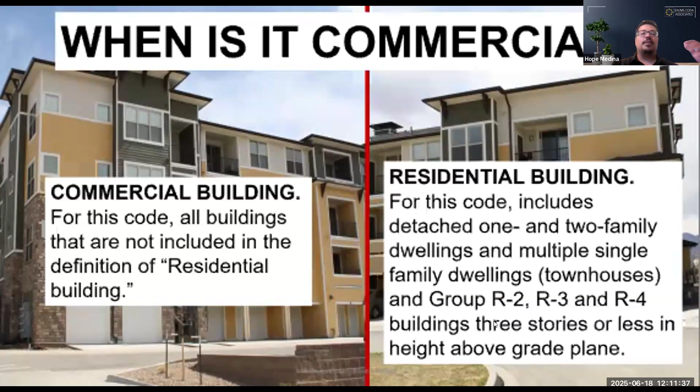There's a lot of parts of that would be built out of the IBC, but for the purposes of the energy code, we'd still be talking about a building where we could apply a lot of things where we're less than those 3 stories. We can still use some of our mechanical ventilation requirements, the same dampers that we would for any other 3-story building, right? There's a number of pieces and parts that fit the bill for that 3 stories or less above grade plane.

So great question again for follow-up. Thank you. Absolutely. So yeah, now we're going to move on to some definitions for you guys, right?

So I promised going over a few of these, and I'm trying to highlight what I feel are the most important ones for this discussion, because I think so much of this really has to do with how we parse out the scoping requirements. And so one of the first definitions we get in the 24 is common areas, and this is conditioned spaces within Group R occupancy buildings that are not dwelling units or sleeping units.

So remember how I was talking about earlier, a lot more of these apartment buildings, as we've typically seen, have the coffee bar area, the lobby and package area, maybe some common rooms for people to be able to use, maybe like all-purpose rooms, like an additional kitchen or things like that. That's not a dwelling unit. It's not associated with anybody's actual dwelling unit, but it's more of a shared amenity space and things like that.

And so we have these identified now as being these common areas within Group R, specifically in the code, right? And there's good reason for that. Not only is it consumer preference, and it's important that we recognize that, get it into the code so we can parse that out, but I think it's also following this train of logic where a lot of folks are pointing out that, okay, we've gotten a lot out of the thermal envelope, and there still is more to get, but it's incrementally more expensive to get, maybe a little bit less bang for your buck.

I was at a training the other day where Hope mentioned, basically she said something to the effect of, how would you show me the difference between an R100 and an R1000? Right? What's the difference going to be other than cost? And from a performance standpoint, it is going to diminish, was her point, right? Is there probably something you gain out of that? Sure. Is it enough to justify multiple changes to the code or things like that? That's where that sort of are you getting your money back over the lifetime of the building question comes up.

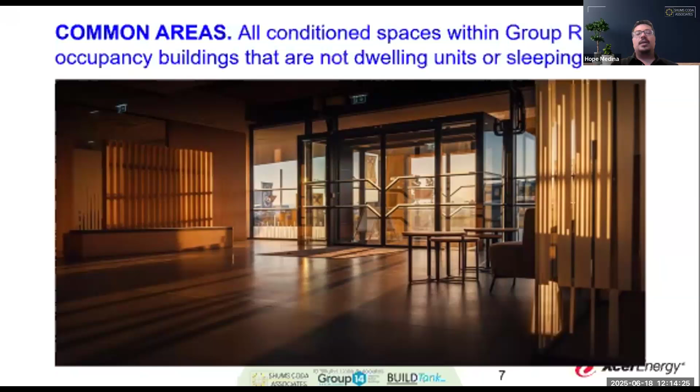These common areas, it would make a lot of sense for like the lights to turn off in them relatively more quickly, less power use than some of the areas associated with your dwelling unit, for instance. So it's a good example of places where we can start to highlight and find opportunities to be able to gain some additional energy efficiency.

So we have living space, right? So this is again defined. It's a new defined term. Space within dwelling unit for living, sleeping, eating, cooking, bathing, washing, sanitation purposes. Basically all the space that you typically use in your studio apartment and your regular home.

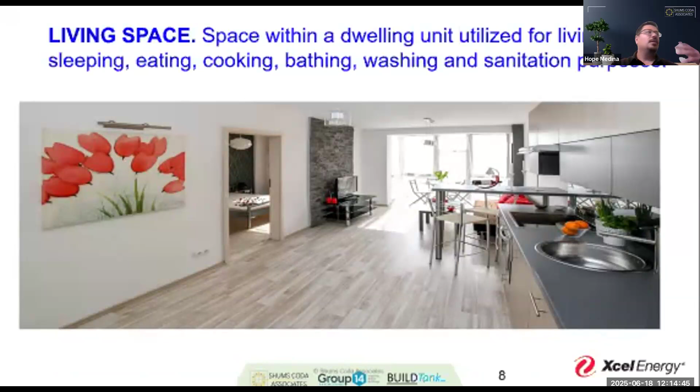And that's meant to juxtapose this area of occupiable spaces, right? These are areas where we are primarily there for like kind of single use or purpose, like a storage room, an equipment room, things to be occupied occasionally and for short periods of time is how the definition reads. And so again, we're parsing out these areas where we say, okay, this is very much sort of the purview of where somebody lives, eats, sleeps, all of that stuff all the time. These are the places that we can identify that are not used in the same way.

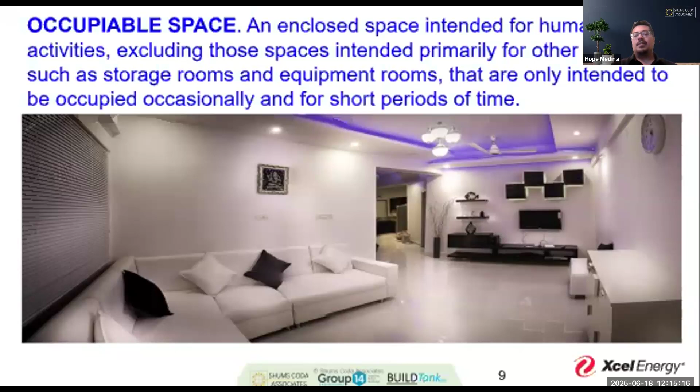I want to really bring this up because the definition out of the IBC is similar but different when we talk about occupiable spaces. So it reads a room or enclosed space designed for human occupancy in which people congregate for amusement, educational purposes, and occupants may be engaged in labor, things like that.

And we still have to provide the means of egress, the light, ventilation, sanitation requirements of the code for what you need there, right? But it is a different definition, and it is one where you do want to be clear about its use when you're talking about the energy code versus something out of the IBC, especially when we have this overlap in multifamily spaces. So just to bring a little bit of attention to that.

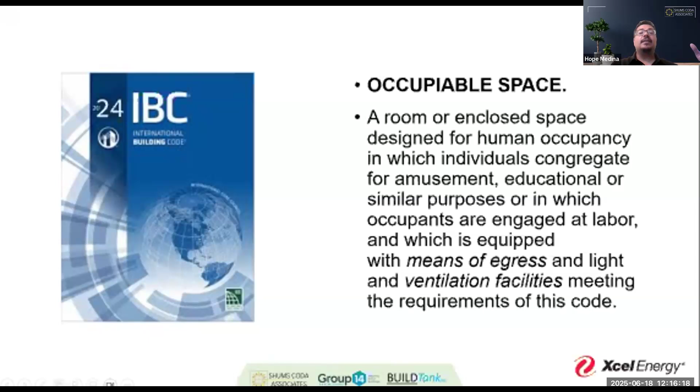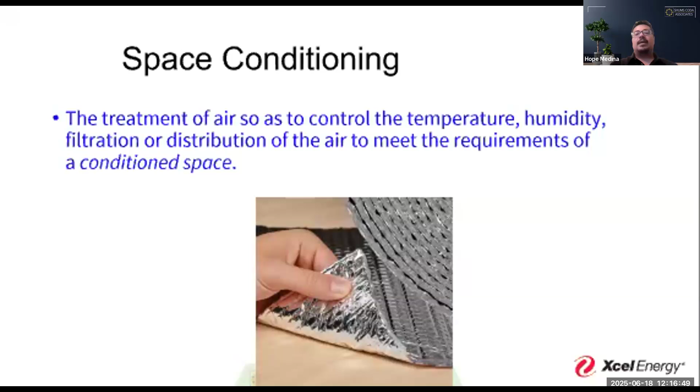So space conditioning is another defined term now, because we were just talking about conditioned spaces in common areas, right? Shared spaces that are not associated directly with any dwelling. Having a definition of space conditioning also helps clarify exactly what the intent is there. So this is the area where we are controlling the temperature, the humidity, the filtration, and distribution of air that makes it a conditioned space, right?

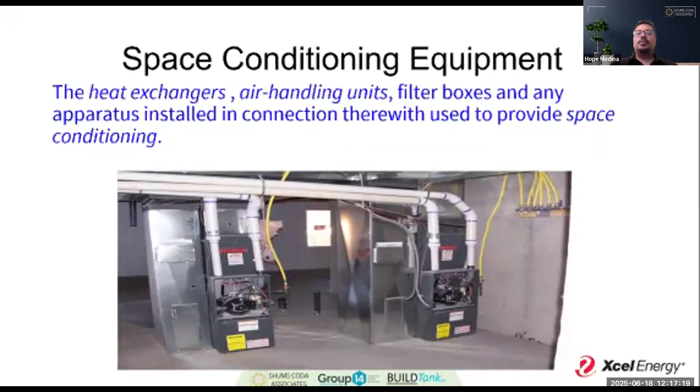We also have a definition of equipment. So we talk about heat exchangers, air handling units, and you notice both of those are italicized, meaning both of those also have a definition in this code as well. Filter boxes, any of the apparatus connecting that to space conditioning. So we can definitely see these through lines of identifying the different spaces, the different equipment, the different uses, and how that's going to translate to probably future iterations of the code and kind of what's targeted in the 24 for trying to find some incremental improvements.

So one of the things that I want to bring to your attention is when you have systems, mechanical systems, or service water heating systems that serve multiple dwelling units. If you do, this is your pointer to say, okay, if you're serving more than one unit, you are going to jump over to your commercial provisions. And you have C403, C404 identified expressly there, right? So this is again one of those places where we're going to say, okay, dwelling units that are self-contained will be out of the residential code. If that's not happening in the same way, then we'll jump over to a more commercial opportunity.

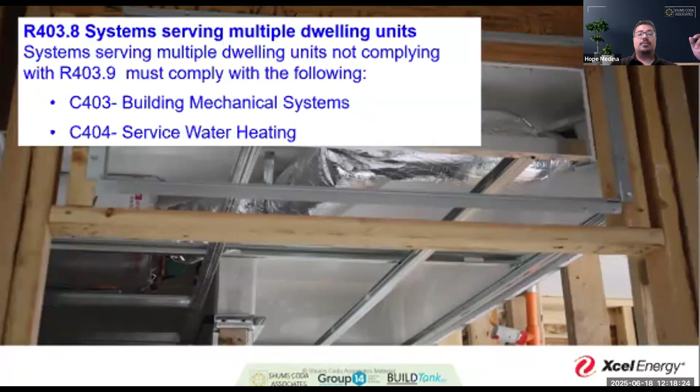So now we're going to move towards some lighting and power related stuff. Because like I said, this is kind of meat and potatoes for some of this comparison and a lot of that comparative change between the 21 and the 24 code. So these are going to be our big target areas: total power allowance, lighting controls, natural gas lighting, which isn't really a big part of this, but it is an important component that's seen a lot of changes in the 21 and the 24, and I just want to make you aware of that. And then electrical metering and reporting as well, monitoring, that whole gamut has been changed quite a bit.

So in the 21, we basically say, hey, your exterior lighting is going to meet the provisions of C405, with the exceptions of single-family homes, two-family dwellings, townhouses, and then solar-powered luminaires. We have a few options here where we can basically say, okay, we will let you off the hook with this. But in general, we're saying that even though you're a multifamily building, we're going to point you to the commercial lighting requirements, right?

And so when we read over this, we go to C405.5, right? That's our pointer. And we have a lot of exceptions that are tied into this, and we basically have a procedure that we have to follow. And so remember, let me go back a slide here, I'm looking at the residential code in the 21. So let's say I had a building that was 3 stories of R2. This is telling me, hey, for your exterior lighting, go to C405. Now, if it's 4 stories or 5 stories of R2, I'm doing that anyway. I'm still going to C405. So basically, this is the catch-all for multifamily construction as it relates to exterior lighting.

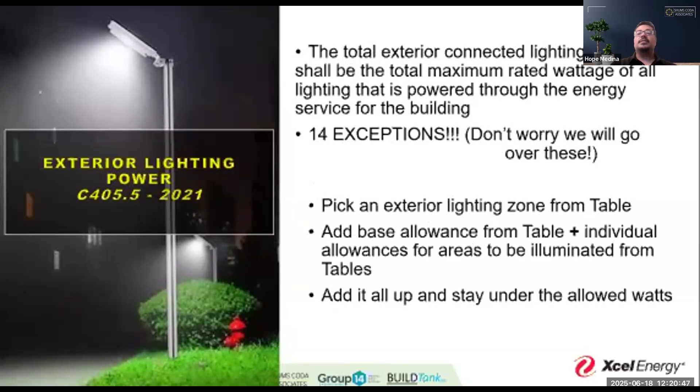And just so you're clear, this is the same procedure that your COMcheck exterior lighting certificate is doing for you. It's looking at these areas, it's looking at your square footages, it's looking at the declaration of what these areas are in comparison to that table, and then giving you that answer. So just in case you're curious.

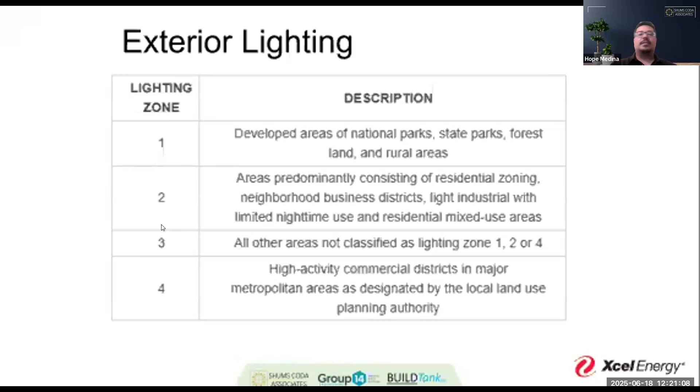So the first thing you do is look at, okay, what space are you in? You pick one of these zones, and then from there, we're going to start making some decisions. Now, the zones here, as they're written, I think it's relatively clear what it's describing. I find it interesting that lighting zone 3 is just sort of this catch-all that doesn't fit 1, 2, or 4. But let's see what that really means.

And then we also have a commercial sector located in that little downtown area there, where we have high rises, where we have extreme power density compared to some of these other areas. Now, one of the reasons I want to bring this up is because historically speaking, this is something typically within planning and zoning's purview for wherever you work, right? They typically look at photometrics, they look at that character of the environment issue and say, okay, this is our purview. We're going to say that that's too much light, you've got to bring it down.

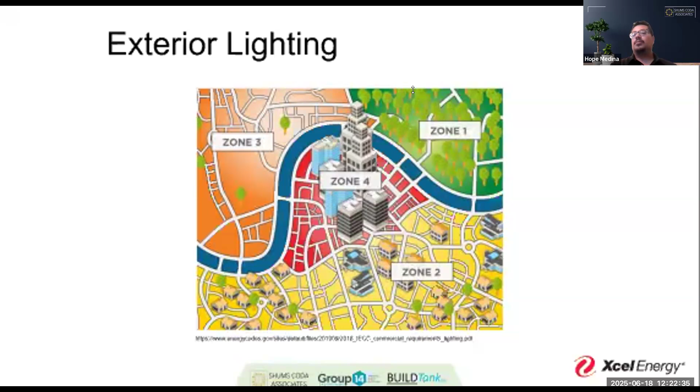And a lot of jurisdictions have been thinking about things like dark sky lighting. So it's really important that if you're looking at adopting a new code or addressing this in your code in the future, that you're aligning with any of those other provisions, because these have historically been places that building hasn't done the lion's share of the work on. And now we're really looking at this with significantly more intensity, so to speak.

So we jump over to our lighting allowances, right? And we see that this is broken up by those corresponding zones. So the first thing that, as a designer, you'd be proposing, or as a code official you'd be reviewing, is: do I agree with the zone that they picked? Okay, great. They said it's suburban. It's a small multifamily, say R-2 complex. Great. This seems to fit the bill. This makes sense for this zone.

Now we're going to look at that base power allowance, and we're going to start adding up all of these areas, right? So we're going to look at those square footage areas versus some of these other areas where they're measured in a linear foot, because that's typically how that lighting is going to be provided, say with walkways and ramps. You're not looking to illuminate that whole area. You're looking to illuminate specifically the area around that ramp or around that walking surface. But you see them, roughly speaking, trying to be germane to exactly what it is that they're trying to light up or provide in the space. So we add all that up.

We also have some additional allowances. Now, the additional allowances do work a little bit differently. We've got some specific areas where we might say, okay, additional lighting is warranted. We're not going to say that it contributes in the same way to the total power allowance here, for things like an ATM. We have building facades, uncovered entrances, inspection procedure areas, drive-up windows and doors. And we can see why that would make a lot of sense for the security of the folks working those areas, the ability to check on passersby or cars coming in and out. 24-hour retail entrances as well.

So we kind of get this idea that, okay, we're going to exempt some of these spaces that are specific to some of those uses that we might also find with multifamily, where we have somebody checking on a vehicle, things like that.

So let's look at the 24 code, and I'm just going to kind of highlight the changes for you because not a ton changed in here, but some clarification did. So we add language here that the watt allowance to the building and the site related to that building, to add a little bit of clarity, because, right, if you get, say, a guard shack for an R2 as you come up the driveway or something like that, oftentimes that little shack might be metered by itself, it might not be. It also is usually part of the overall site as it's developed, right?

And as it's reviewed. So again, this is one of those places that's a little tricky because we're talking about some of the places where sometimes zoning has that first sort of right of refusal of how we're going to parse this whole thing out versus how we usually conduct it, which is, okay, we're just evaluating each building on that site. Here we're looking a little bit more holistically.

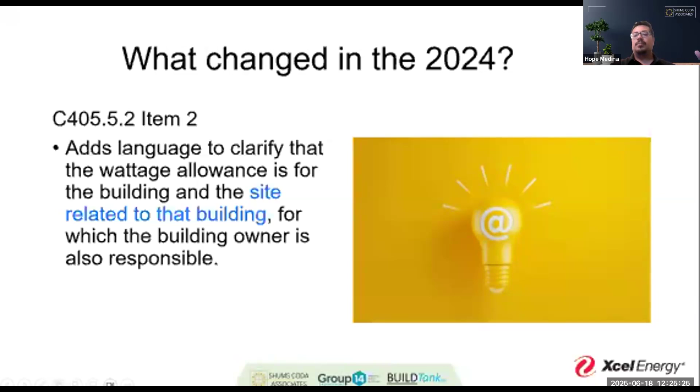We see some updates to the tables in the 24, so a lot of blue in these places. We see tighter densities overall, so the base power allowances have gone down. Some of these individual areas for what's allowed have gone down. One that I really want to highlight for you here is stairways, right? A lot of folks, when this first came out, had significant concerns about the issue of limiting light in areas meant for egress and what that could mean.

I mean, stairways, tripping hazards, right? They're like the number one reason that you get a lawsuit on a building. They're typically what we find to be dangerous areas in buildings. And the handrails, all the safety appurtenances that we put there are typically for the folks that are going to have the hardest time traversing those areas, right?

They're for everybody. But I've heard multiple good code officials, good trainers say that the code is made for old ladies and young kids. Right, we're going to try and protect those that can't easily navigate the world or protect themselves. And stairways definitely fall into one of those places where people easily get hurt. And so that exemption makes a lot of sense across the board there.

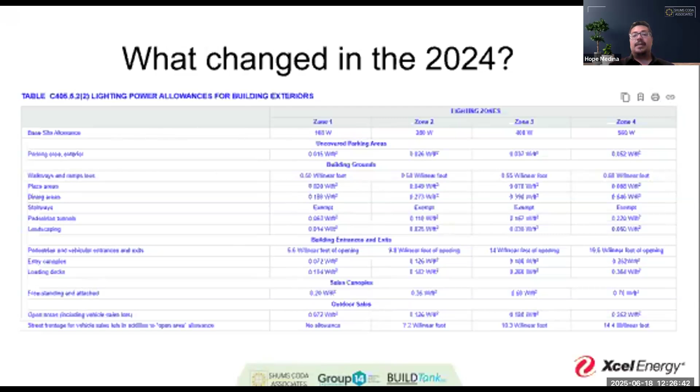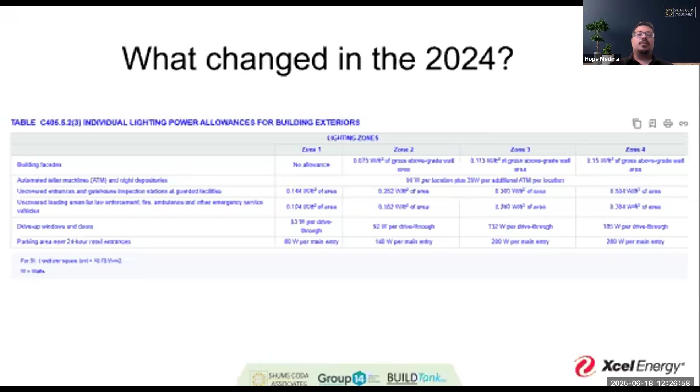But you can take a look for yourself at some of the other items here that have changed. That whole table is now published in blue. We also see our individual lighting zones, same thing. We've got a little bit more density, or excuse me, less power available for the density of the area is what I should say. But still, relatively speaking, similar to what it was in the 21 with updates, right?

And so, big sort of highlights of these changes. The base power allowances are much less than what was in the 21. In a lot of places, they're half, but it varies by the zone. The exemption for the staircases is definitely something to remember, and definitely, in my mind, a good change and advantage to the 24. Reduces the wattage per square foot, so making all of these areas more energy efficient. And then rewrites table 405.5.2.3 to make all items subject to light zoning requirements.

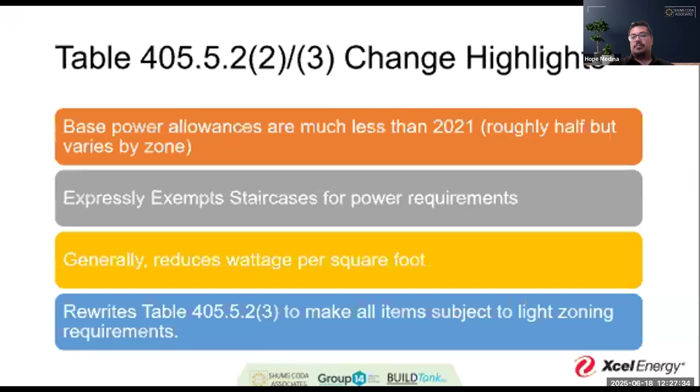Now remember that we had 14 exceptions, right, for the areas where we would say that the total connected power might not be calculated or included. And so we're going to go over those exceptions, and we're going to go over kind of what changed in the 24 for this. So one, right out of the gate, we say things approved by the code official for safety considerations. Remember, approved isn't a defined term, and that requires discretion by the code official to demonstrate approval.

This is a place where having a clear policy about how you define what a safety consideration is and how somebody might apply to use that exemption makes a lot of sense, because it is very vague in the code as it is written. And you could save a lot of time, a lot of effort, a lot of headache by making sure your staff is on the same page. So one person isn't just approving any lighting that somebody says, well, it's important for safety. Whereas maybe you have another one who's saying, no, not at all.

Like, you really have to demonstrate, keeping a very high threshold of what safety is and using their own discretion, finding some middle ground in there where somebody can make a case, or explain why this is important to their business model from a safety perspective, or things like that. And that includes multifamily areas, right? So if there are certain walkways or things like that that might abut a specific area that people have concerns about, maybe by train stations, bus stops, things like that, where you have a lot of traffic.

Those could be areas that would make possible sense. But once again, it needs to be specific, needs to be something that you outline a good rationale why, so you're not accused of prejudicial enforcement on any one particular issue or item.

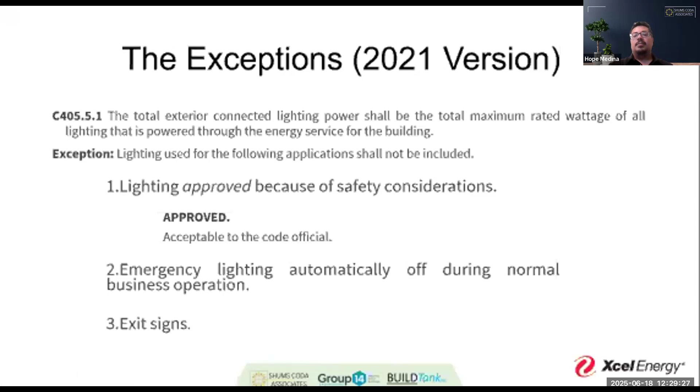Emergency lighting makes a lot of sense, right? We're not going to calculate that in along with exit signs. We're requiring that light to be installed. We definitely don't want that to say, well, now we have to limit or make dimmer the overall building because you've got to provide the exit signs necessary to be able to get out of the thing, right?

We also get specialized directional lighting and markings for transportation. This could be leaving a parking garage in a multifamily building, and maybe you have lights that let you know a pedestrian is coming up, or that spotlight pedestrians coming up. That could make a lot of sense in a circumstance like that. We don't want to create issues where things are unsafe for folks.

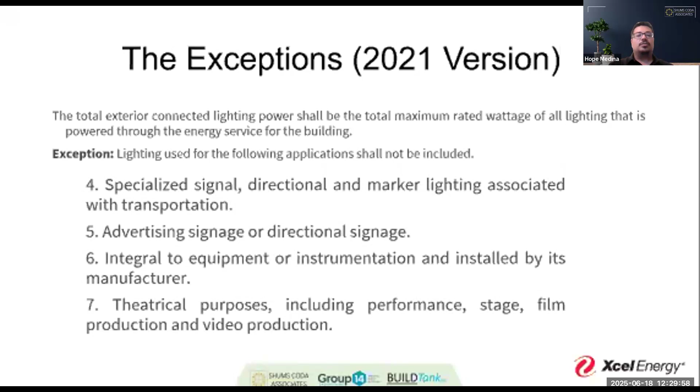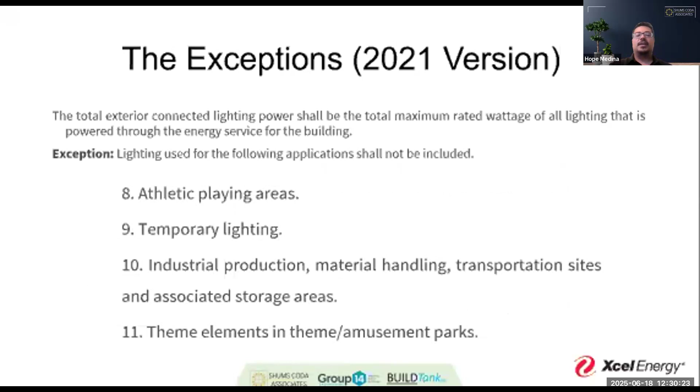Advertising signage, directional signage, theatrical purposes, some of these are less germane to that multifamily question. Athletic playing areas, that's definitely one that can come up there as well, right? Tennis courts, pickleball courts, things like that that you might have associated with an R2. Temporary lighting, event lighting, things like that. These are all places where we might look at specifically with that R2 lens and say, okay, we're going to figure out how we're going to address this issue of additional power.

Public art, monuments, and the national flag. Once again, I will highlight for you that that is specific to the national flag. I know a lot of developers that have maybe multiple monuments around a traffic circle that have state flags, their own flag, their icon, whatever it is. And so, again, having a clear definition of how you want to handle that policy, making sure that it's either specific to the national flag, or if you're adopting it, making any alterations that you want to be more pluralistic.

Definitely this is a place where I think it's worth highlighting, just so somebody doesn't make the wrong choice, whatever they end up doing, or misinterpreting that to be more broad than it is. Water features, swimming pools, definitely germane to that R2 question as well.

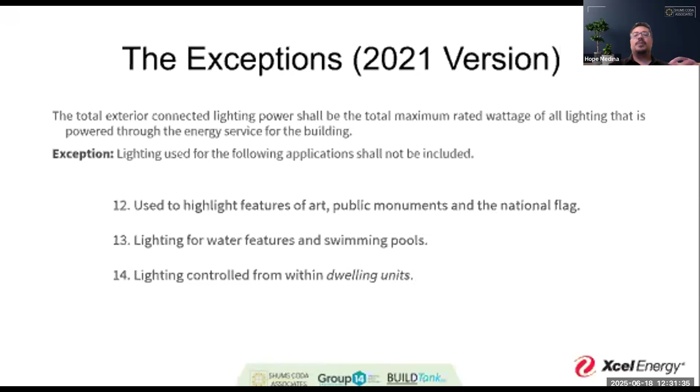And then obviously lighting controlled from within dwelling units. So that's going to be an important one that we'll get to more towards the end of the presentation for the lighting components, because you still have your exterior lights on people's porches and things like that, and those are going to correspond to those dwelling unit related controls out of the IECC. So it's going to be a little more specific than that.

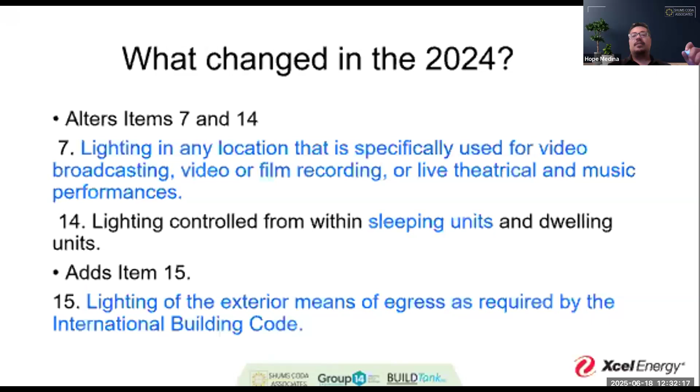So what changed in the 24 in all of these exceptions? Well, in 7, we get lighting in any location used for video broadcasting, not anything particularly specific to an R2 configuration. But if there are, for instance, some areas with apartments and maybe a wedding venue or something like that, where there is any equipment, maybe this is a place that might come up. There's a few different ways to look at that. Sleeping units, and then lighting that's required by the IBC in and of itself. So we get a little bit more clarification about those things.

So here we see an exterior lighting plan, right? So we're looking at this from a commercial perspective. We've got a large parking lot serving a large commercial building. And here might be an example of what we're getting for our lighting compliance certificate, where we have our parking areas, we have our units for wattage installed, and we get a clarification of how well this passes beyond code.

Now, if you had your druthers, this might be a place, depending on which code you're on and how much of a role your zoning department plays, if they can help review this document by requiring it and receiving it, or if you're taking any other pathway like a simulated building performance pathway. You can also produce a lighting certificate that's very similar to this.

But demonstrating that and showing that this is in compliance might be a way to make sure that your requirements align, that you're not approving this saying, well, you passed your exterior lighting COMcheck, but your zoning department is saying, yeah, but you still have the wrong amount of lighting for our needs or our requirements or our zoning resolution, making it very clear that you aren't doing the same review or supporting each other with that. Those are the kind of concerns that as you look at adopting this code that I would have from an administrative standpoint.

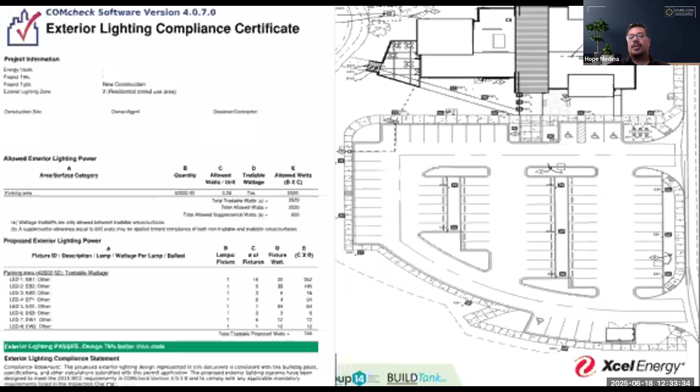So then when we jump over to the 2024, things look a little bit different when we ask that same question of going to R404.1 and asking, how do I handle exterior lighting? Well, this has a different pointer. Remember, the first one we looked at said, hey, if you're residential and you're multifamily, just go to C405. Just go over to the commercial code and start using that.

This reads a little bit differently, and it says R2, R3, R4 buildings are going to comply with these sections 404.1.2 through 1.5. And then we get our same exceptions for the most part here, that are, hey, we're going to exempt our single family dwellings, our townhouses, solar powered related lamps, motion sensor lamps, other luminaries that comply in this particular section.

So now we're saying, hey, if you're multifamily, we're not going to send you to the commercial code. We're going to have you use these provisions so long as you still fit the residential definition of the IECC. So really important change there for that pointer in the way that it works. So now in the 24, if you're above 3 stories or you don't fit that typical parameter of that residential building, great, go work with the commercial section of the code. If you are, stay here and continue to read.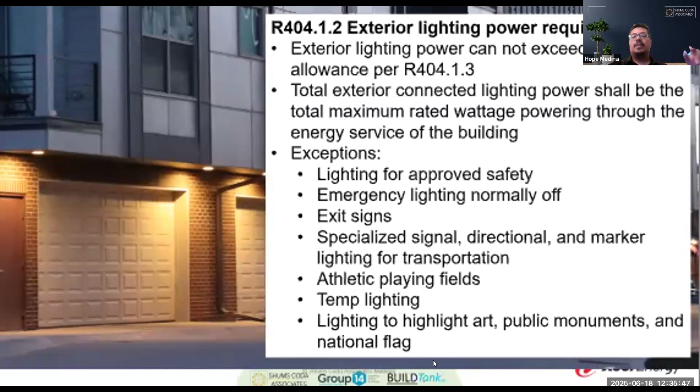Remember, again, this isn't italicized here, but it should be, in my opinion, because it is a defined term and it does require discretion of the building official to demonstrate that it is approved, but neither here nor there. We also have athletic playing fields, right? We talked about that earlier. Specialized signals, exit lights, temp lighting, public art, monument, national flag. Again, that national flag thing did not change between the 21 and the 24. So you can see that they've sort of parsed this out specifically to what's important for multifamily.

And so we get a similar chart to what we looked at earlier, but remember, this is still in that table R404. So we're looking at this saying, okay, go to the power allowances right down here. This is a little clunky the way that it's written too, I will tell you. The first thing we get is, hey, stay here, read these sections. And then before we get to the rest of those sections, we get the lighting power allowances table. It's a little clunky, it's a little off on the way that it's written, in my opinion.

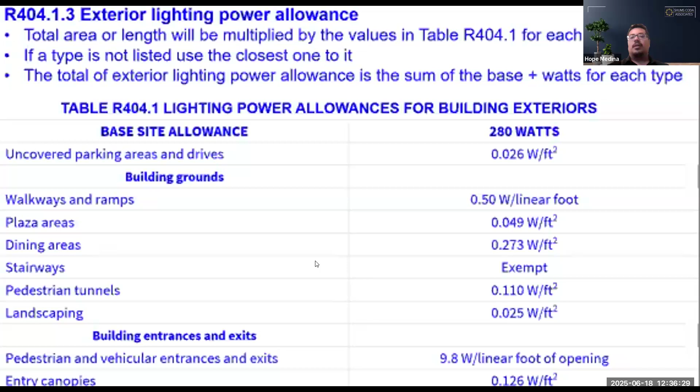And we get this base power allowance right out of the gate, right? And then we also get these other areas that can be associated for our power allowances, for building exteriors. So that's in high level, sort of those differences in the way that the overall setup is between these two codes and the way that it's going to work between them.

Then we kind of get back to dovetailing on some things with exterior lighting controls. A lot of this has remained very similar, right? We have automatic daylight shutoff. We don't want to run the system if daylight can handle it. Decorative lighting shutoff has this 1 hour capability, right? So it gets sort of a set point associated with it. And then lighting setback can be reduced by 30% from midnight to 6 a.m. or 1 hour after closing, or no activity after 15 minutes.

Now, a lot of that you would typically see associated with some of those business occupancies, but remember, with podium type construction, you can have that sort of same issue where you're going to have your business occupancies and your residential tied directly to it.

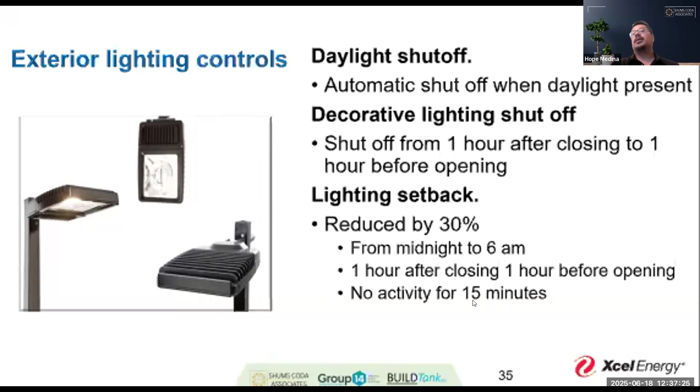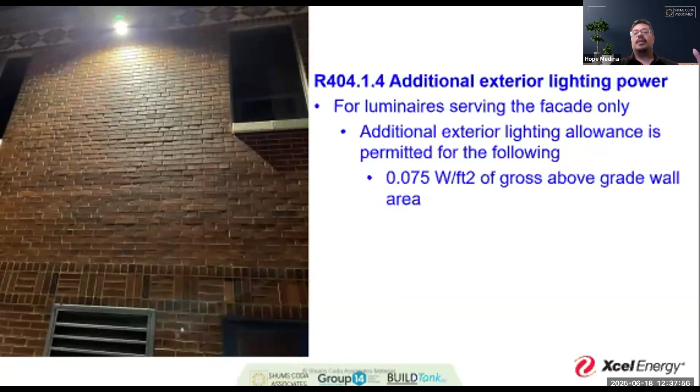In 404.1.4, in the residential section in the 24, we get an equivalent amount of wattage per square foot, that 0.075, for building facades as well to be illuminated. So this sort of dovetails with what was already in the commercial sections that we just looked at a moment ago, but we just add this in for specificity because once again, we are talking about these instances where we are, instead of sending people to the commercial code, keeping them here and giving them all the parts that they need to navigate the multifamily question.

So again, here we're seeing some exterior lighting components and controls and kind of questioning, okay, do we have the information that we need? Okay, we see a timer located right up here. Timer would work. Timer is a valuable option to be able to use for this. That can go, right? So our time switch function, if we're going to use something like this, we get a 7-day clock. We've got some basics associated with this for its automatic shut-off features, has to recognize holidays, has to have manual override, and then control light has to be 2 hours or less, and illuminating areas less than 5,000 square feet.

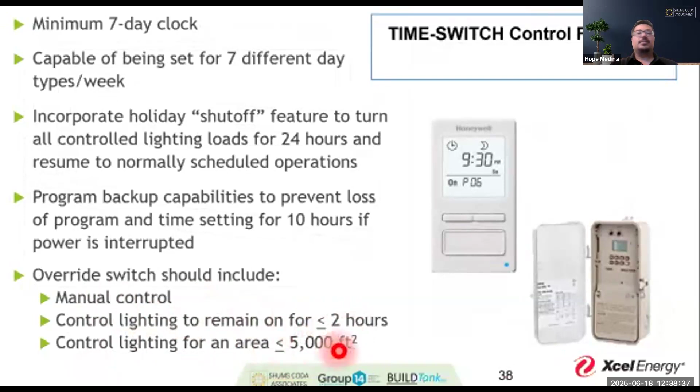So on our plans, we should typically have some sort of lighting control narrative that's going to tell us, okay, where are these mounted? For instance, here we have an exterior mounted relay switch, and it's running off of that astronomical clock for sunset and sunrise. Right, so it's recognizing those things there.

We also have vestibules, another place where we might have that common area question, right? As you come into your R2, you might have a lobby with a vestibule. That vestibule needs to be recognized accordingly for its lighting as well, and provided in this particular chart, they're kind of breaking down each and every step along this and giving us that relevant sequence so we can know as the plans examiner, great, I have what I need. This whole thing for this project works in terms of its required controls, and it makes it really easy for the folks out in the field that have to go and figure that out to make sure that what was installed is accurate.

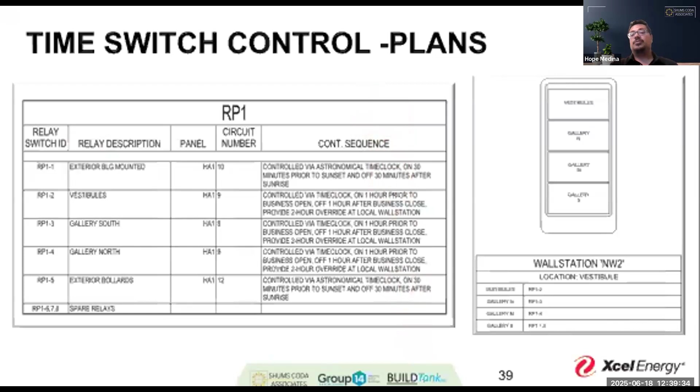So when we talk about common areas, we do have a couple of other items to bring up. If we're talking about the commercial code here, I'm going to take you to C409.6.1.6. And basically here it's the exceptions that I want to point out for you for our maximum miscellaneous loads. So when we're talking about dwelling units, you get 0.42 watts per square foot for any additional maximum miscellaneous equipment load. But multifamily common areas have none. So just to be perfectly clear, when you look at that miscellaneous equipment item, and you're looking at those R2s that don't fit that parameter of being in the residential section, make sure that no one's claiming additional miscellaneous load for those common areas.

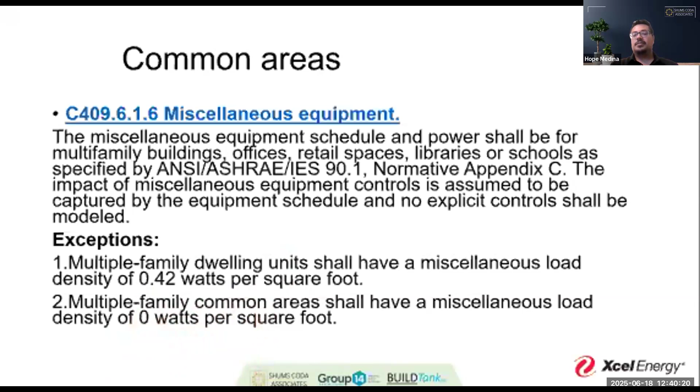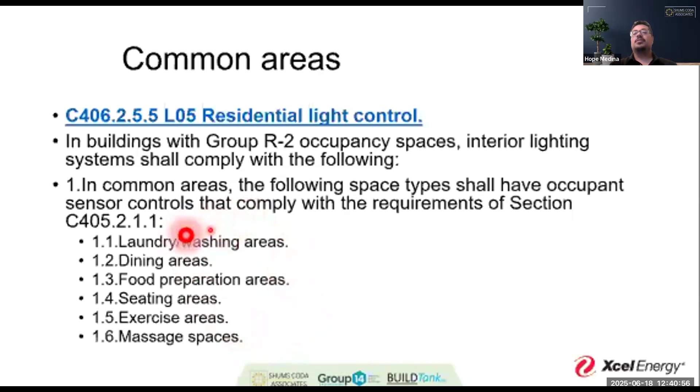And then again, for common areas here, right, where we talk about R2 occupancy spaces and interior lighting systems, these are areas that are outside of the dwelling unit itself, but again, serve those common area uses. Those can be our laundry rooms, right, dining areas, seating areas. Maybe you have a little movie theater area or something like that. A small gym is super common to provide in a condo space or things like that. These are some of the areas listed here where we're going to say, okay, the occupancy sensor requirements are also going to be part of your conversation.

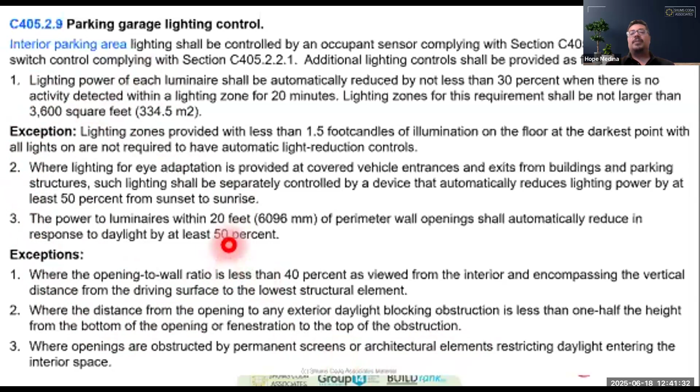So now let's step completely out of the building and let's talk about the parking garage lighting controls. So we have some small updates to this in terms of location, moving that over to C405.2.9, and we explain that, okay, our interior parking areas are going to follow our requirements, but between the 21 and the 24, there are very limited changes in this. So we are going to be controlling that overall amount of light, decreasing the amount of luminaires that are going to be running fully, and dropping that by that 50% threshold here.

So this is kind of your summary slide of all of that code, so you don't have to read it all at once. But you can be on an occupancy sensor or a time switch. You're going to reduce to that 30%, no less than 20 minutes. Zones can't be bigger than 3,600 square feet. Entrance and exit separation lighting.

Let's see here. Sorry, I need to move one of my windows because I can't read my slide with my own face looking at me there. There we go.

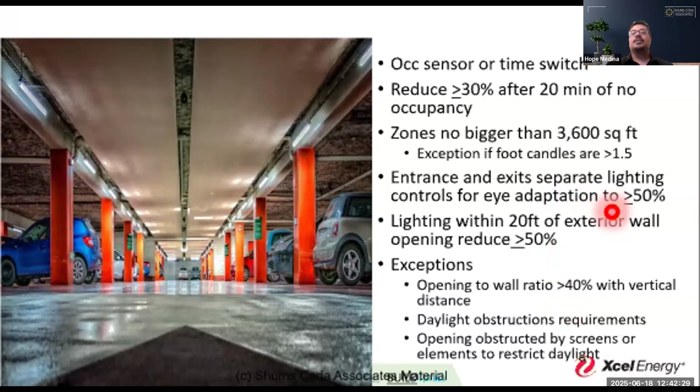For eye adaptation to 50%. So that's basically saying, hey, okay, it's really dark in here. As you step out onto the street, if you want to add additional lighting to make sure that it's a safe transition, that can be done. That does make sense, right? So you're not just getting blasted by a spotlight, because Lord knows I've had that happen to me a couple of times. And if you have like an astigmatism like I do, then yeah, good luck seeing for like a good 10 seconds trying to make a blind turn, right? So we're just trying to keep that a little bit more safe.

And now we're on to fuel gas lighting equipment. So in the 21 and the 24, basically both of them have the same provision that you can't have a continuously burning pilot light. One thing that I do want to bring up on this is who inspects that issue. Is it your mechanical inspector who's looking at the gas piping? Do you have somebody in your shop that is specific to energy and sustainability who will be reviewing final equipment? Is that done at final building by your general building inspector?

Who is going to be responsible for identifying and facilitating this inspection on gas lighting equipment to make sure that it's functional and that it's not equipped with the continuously burning pilot light? Now, the good thing is that because we've had 2 iterations of code cycles in which continuously burning pilot lights for gas lighting have been prohibited, a lot of manufacturers have come up with solutions for that.

And now in the 24, we get defined terms for every one of these, which are on-demand pilot light, intermittent ignition, and interrupted ignition, which also tells me that the manufacturing industry is specifying exactly which of their products will fit which of these definitions. And because there's more than one way to go about doing this, folks are exploring this space and coming up with logical, sensible solutions to be able to provide this lighting.

Now, the other thing that I want to bring up is depending on if you've looked at the MLECC, that's the Model Low Energy and Carbon Code from the Colorado Energy Code Board. Gas lighting has been one of those things that a lot of folks have said, hey, it's not used very often, so maybe just prohibiting it outright makes sense. I know a number of places have made recommendations to that effect.

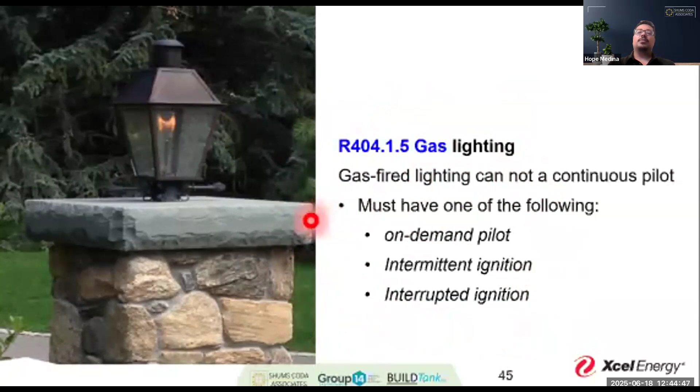So energy metering. These are all new in the 21, I want to be very clear. This blue language came out of the 21 code, where we're looking at energy monitoring and energy metering. Now, Colorado's also got its own thing going. A lot of folks are familiar with the energy monitoring and building performance requirements from previous actions from the Colorado Energy Code Board, and I don't want to confuse those at all. I just want to bring up a couple of things specific to energy metering and monitoring as they relate to the 24 code and your next steps.

Specifically when it comes to energy metering, you can submeter specifically for exterior energy use and some of these other items for that kind of tracking. That is enumerated in the tables below this. The other things added in the 24 included some data collection related updates, some service water heating related updates, and some renewable energy specific submetering and non-electric submetering. If you haven't looked at this in a while, or it's been on autopilot because you have the state program, it's worth familiarizing yourself with the differences between these two.

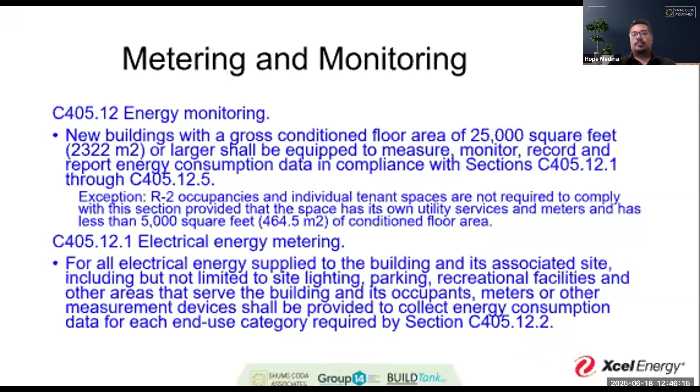So new to the 2024 code, 405.15, we have on-site renewable energy. This is a requirement to add renewables to buildings with some express exceptions where you have low solar radiation. I didn't include the whole definition here because it was really long, but it basically says you can't get enough solar radiation to justify the installation of the assembly.

Another one here is 80% of the roof space has permanent obstructions. So again, we can't put enough of a system on there to justify the full installation. If the building is shaded naturally for 50% for more than 2,500 annual hours, as it's analyzed there, if you're looking at that and saying, "Hey, I sit in the shade of a mountain."

There is no way, like I can put as many solar panels on this building as you want, and it still won't capture any sun because sun doesn't hit here except for a couple hours and a few months of the year." Well, they're going to take that under consideration to say, okay, these are exceptions to the on-site renewable question. And then your gross conditioned floor area less than 5,000 square feet.

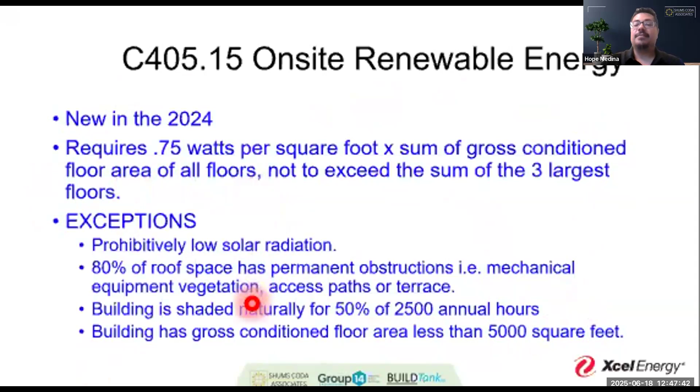Now, if you fit these exceptions, or you can add some but you can't get the full amount that you are supposed to out of C405.15, then the code points you to another direction, which is offsite renewable energy. And it says, okay, if you can't do that, then you're going to buy some additional on-site renewable or offsite renewable energy. And it has specifics on how long the contract is supposed to last, that it's 10 years, and must survive a partial or full transfer of ownership of property.

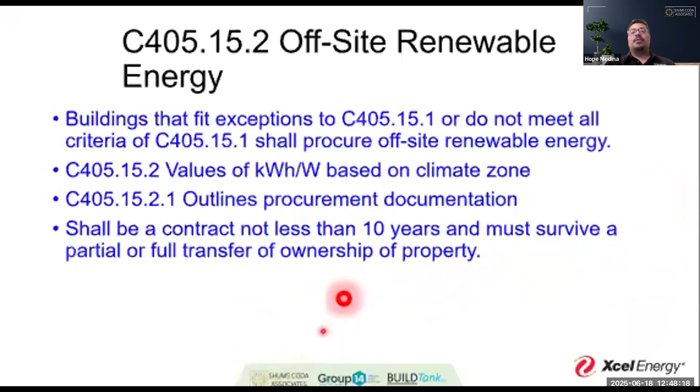So there are some parameters here to really look at and familiarize yourself with, especially as you look at, once again, the MLECC, that's the Colorado Energy Code Board's recommendations, and just making sure that you understand the way on-site renewables and off-site renewables are going to fit in this overall conversation about the energy code as a whole. So don't forget, we also have pools, spas, and all of this fun stuff. So we're going to hit these fairly quickly.

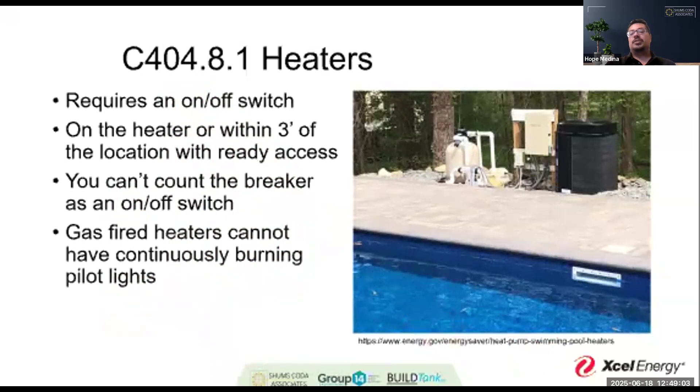So pool heaters, we're going to go to C404.8.1. It requires an on or off switch. The on or off switch cannot be the breaker. It has to be a specific switch within 3 foot of the location with ready access. And gas-fired heaters, once again, can't have those continuously burning pilot lights. So we're back to the same issue of using those definitions out of the 24 for intermittent, on demand. There's a few different ways to look at those pilot light issues. Now that they have definitions, that's kind of clarifying about exactly how to handle that.

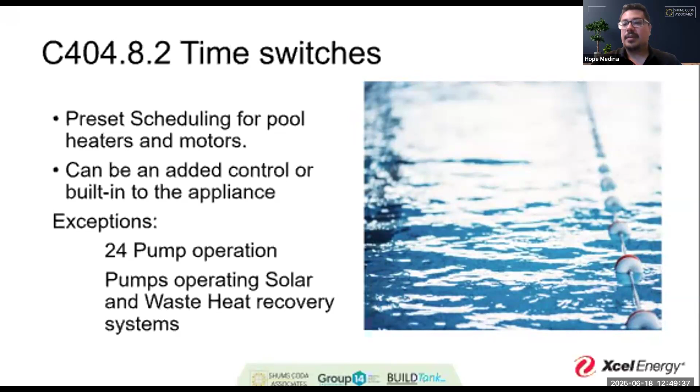Time switches for pool heaters and motors can be added as well. However, there are exceptions if you have a requirement from a public health perspective that a pool needs to be in 24-hour pump operation, or you get a percentage, 75% of the energy needed in order to run that pool heater from solar energy or waste heat recovery systems, renewables, that sort of thing. The important thing to remember there is it is specific to the use of that pool, not just the overall building. So that gets a little bit more clarified in the 24 as well.

In pool covers here in the 21 and the 24, we can see that we get that clarification. So we have the covers definition on both sides here. Not a lot of that has changed. In the 21, we see, okay, we have this 75% of the energy used for heating, not less than 3 calendar months, is from a heat pump or on-site renewable energy system. You're not required to install that cover.

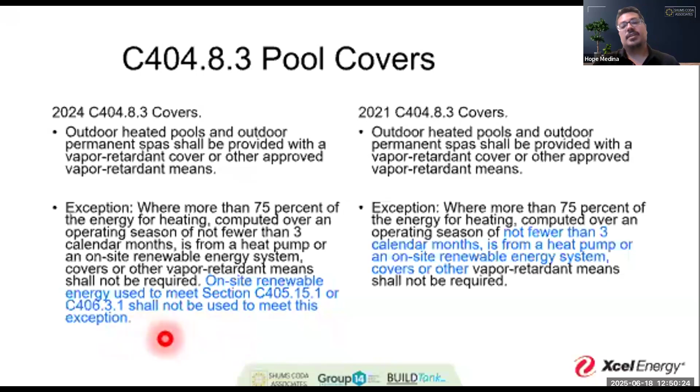And so we keep that same sort of language, but we also add that on-site renewable energy used to meet C405.15, which is what we were just looking at a second ago to say your building needs renewables in the first place, can't be used to meet this exception. So once again, this is specific renewables to cover the pool. Your pool and spa standards, if you have to look at those, you're going to be looking at APSP 14 and 15. Specifically, 14 is for portable spas. 15 is for permanent.

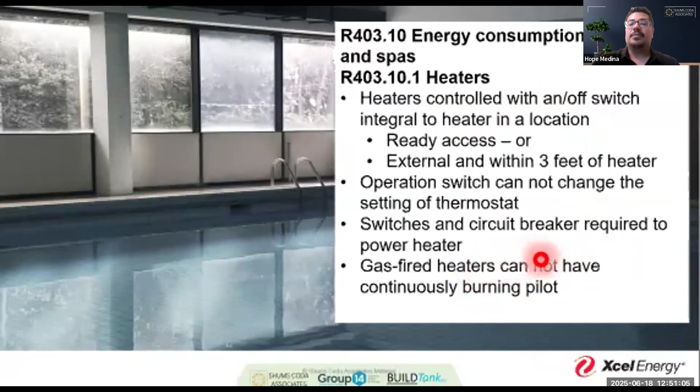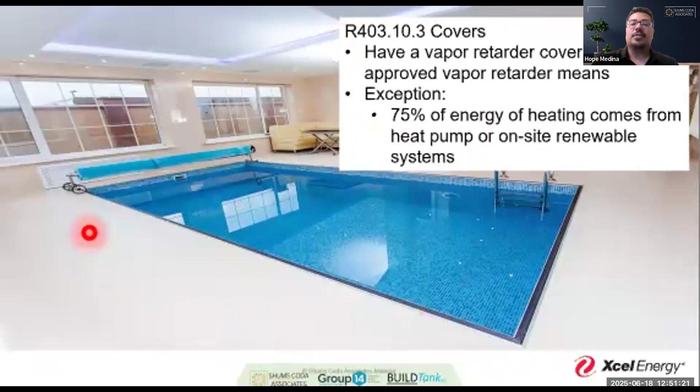So again, if you're looking at this from that residential perspective and you're in that multifamily R scenario, then same thing. We're looking at similar control related items, similar issues with the pilot light needing to be non-continuous for its burn, and you can't use the circuit breaker for the switch necessary to turn off the heater. You can use time switches and you get the exact same sort of exemptions here. So a lot of duplication in these places for alignment between these two codes. And again, same thing on your covers or vapor retarders going over that pool. So in large part, a lot of similar requirements. And your energy consumption will comply with APSP 15 as we discussed.

So now let's move over to heating the outside or adding those cool appliances on the outside people love to use. If you do, first of all, you have to use a radiant system in order to be able to heat that space. Radiant systems can be a number of different types of system. They have to be able to turn off by themselves, using an occupancy sensor or a timer switch for shutdown. But they can be electric resistance heating. They can be fuel gas systems. They can be fuel-fired systems. There's a number of different ones out there for heating exterior spaces, like this fireplace right here, but these are the parameters for them. They do have to be able to shut off by themselves. They can't be left running.

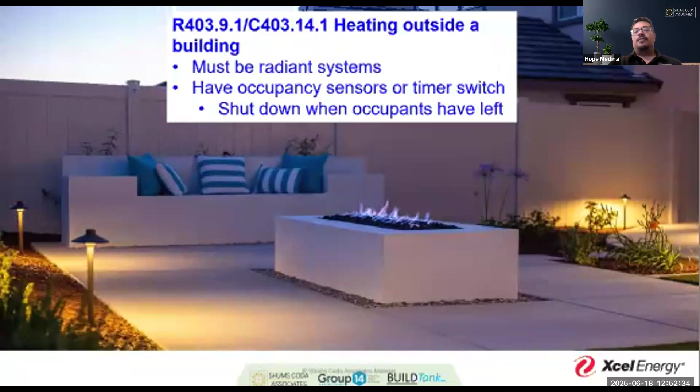For snow and ice melt systems, notice here what I've done is just on both of these, I'll go back a slide for you. I've put the slash in here because they're literally identical between these two codes. So once again, there's a lot of alignment here. And so R403.9.1 and C403.14.1, depending on if you're in residential or commercial respectively, are very much the same, along with R403.9.2 or C403.14.2 when we talk about snow melt systems.

They have the same requirements for its automatic shutoff when we're talking about that 50 degrees or greater and no precipitation is falling there. And they can be turned off automatically. They can also be run manually, right? So there's a number of different sort of items there with your controls.

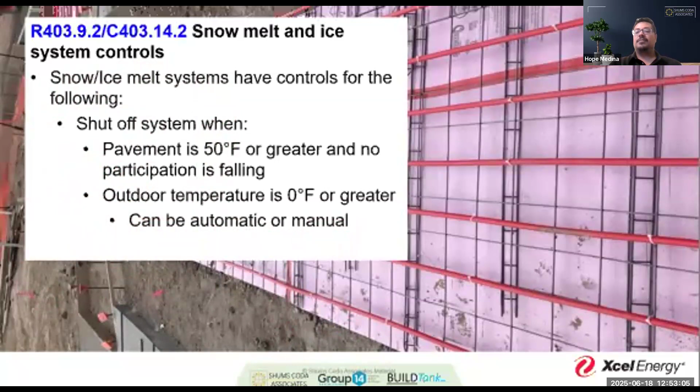On roof gutter and de-icing systems, again, we get the same sort of items between the two codes, and we get some specific items for our controls. So again, that 40 degrees, or we can use a moisture sensor, daylight sensor, right, for either of these options for controls. And we get that shutoff trigger point there.

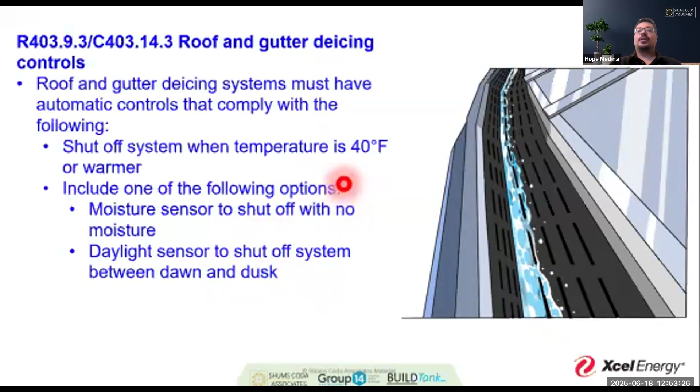Last but not least, we also have deep similarity there between R403.9.4 and C403.14.4 on freeze protection for systems as well. So if we have that outdoor piping, heat exchangers, those sorts of things, then we get our set points for shutoff, as well as identifying when conditions that liquid will not freeze. So we get some specificity there that aligns between both codes.

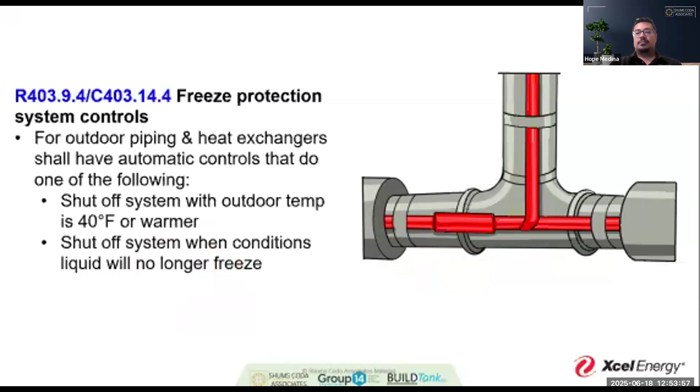And that is basically the large part of our presentation for today. So to wrap things up for you, remember, we just finished number 2 of these.

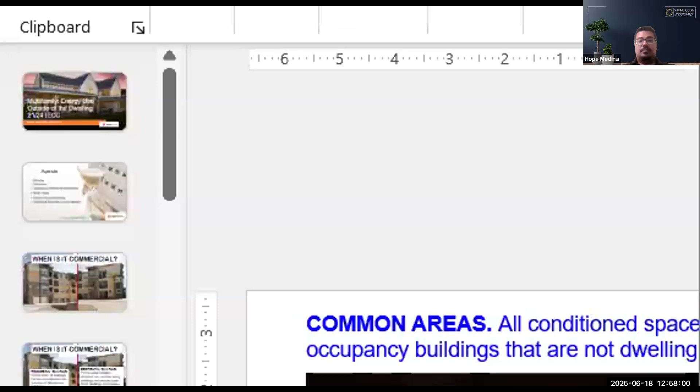Hey, Andre. Hey, what's going on? I just had a quick question. Are these eligible? Can we get CEUs for these? Yes, you can. How do I get them? So you should be getting them, and I apologize if you have not. Let me do a stop share here. Let me know what classes you've attended. I will go back through and see if you just weren't added to the list when we sent out our certificates. But yeah, every one of these is eligible for our CEUs.

And I did the envelope that you presented last, and then this one. And then I plan to, of course, take the following classes in the series. Perfect. So the envelope one I sent out to our admins in California yesterday, got all the register lists and got everything processed with ICC and with AIA, because we get some architects on here as well. So usually it's a couple of weeks before you start getting your certificates. If you don't hear from us, let me know and I will hunt it down.

I'm curious if these get entered into my ICC account. Sometimes they do that. Yeah, we don't typically enter them directly into ICC like that. We will give you the certificate for you to be able to add it, and we will add the class so that way ICC knows you attended, and in case they want to audit you or check in on your attendance, they'll be able to see that we have you on a registrant roll and an attendance roll. So we can show that you did what you were supposed to.